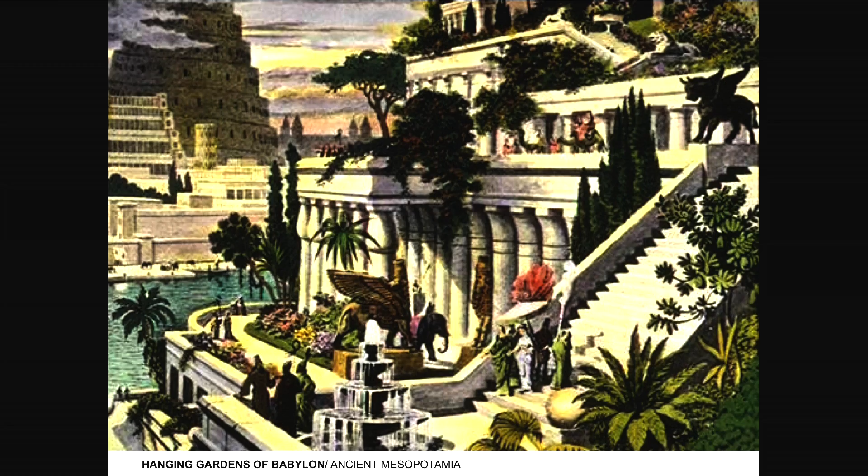It was built in a drier climate, brought in all the plants, the lushness for Nebuchadnezzar's wife, who longed for the lushness of it. And Michael, if it makes you feel any better, they did pump the water up and recycled it. So there's a precedent. An Archimedean screw, which is not a dirty word. It's actually a pump.

This is form, I'm function, apparently.

Okay. All right. So at any rate, we really learned a lot from these, and not a whole lot has changed over the millennia. Biophilia is a human tendency to affiliate with life and natural processes. Now, it seems odd to a group of folks that we have here, landscape architects and students, that you really have to associate nature with people and lead them to it. It's second nature to us, but we have to realize that most of our clients and the end users of our projects aren't necessarily as tuned into this. And so it's up to us to help them understand that.

Next. And we all know that there is comfort in the landscape, especially associated with water. And Olmsted certainly was the prince of knowing all of this, and understanding the lungs of the city was so important in terms of our human health, particularly in urban environments. Next. And in terms of performative landscapes, those landscapes that act for us and help perform within the landscape to help cleanse and to purify.

You may not know that Frederick Law Olmsted, during the Civil War, was the Secretary General of the Sanitary Commission. And part of his job was working with the Union forces in understanding some of the issues with water and bad water specifically in the Army. But he used this knowledge when he began working in Boston with the Emerald Necklace, really understanding that water could carry disease, it could carry illnesses, but at the same time, you could also use water and nature to be this performative landscape that gave comfort and pleasure to people and worked for us.

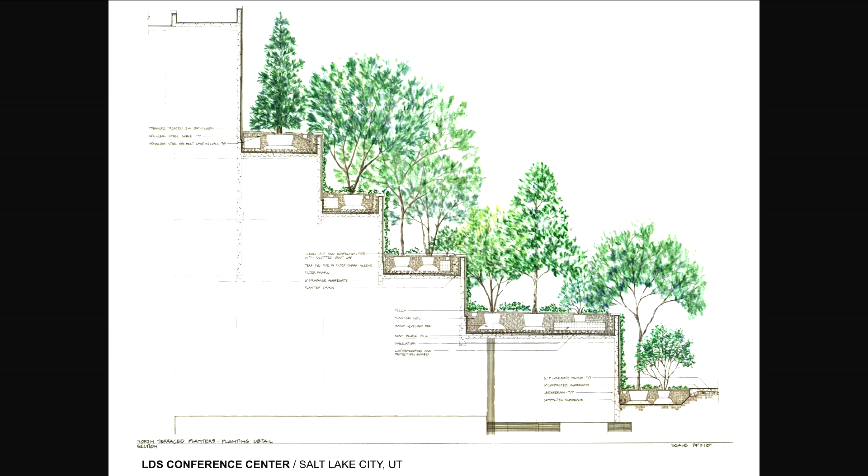Next. You can see here at the top on the roof, there's a 4-acre meadow. And this is, again, a water-receiving landscape, but we were trying to use native vegetation that used the lowest amounts of water and also the lightest and shallowest depths of soil. But you can see one of the things we were trying to do was really to connect those natural elements across to the rest of nature. Next.

So we're going to talk a little bit about moving ahead with some ideas about how to make places better and make them better for people, as well as for the ecologies that are supporting the place themselves. Steve Kellert at Yale is a proponent of this idea of restorative ecology. And we say we use ecotechnology, which is taking the world of ecology and applying it into the built environment for specific purposes of achieving performance. And that is the performative landscape.

Steve says interaction with nature is critically important to human well-being and development, but sadly has been compromised and diminished in modern times. Through deliberate design, this connection can be repaired and restored. Well, think about a shopping center that was built in the 60s and 70s. Think about your project that comes in later to displace that.

You have an opportunity to restore that place for people and for the ecologies that were displaced prior to your project going there. So this moving ahead idea is about restoring. This project at MIT, this is, believe it or not, a Frank Gehry building. I know it's tough to imagine. But here's the Gehry building with Laurie Olin's landscape.

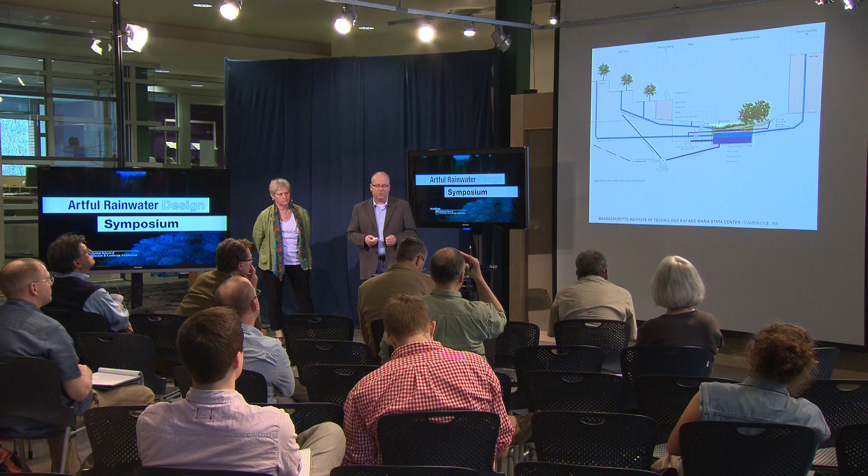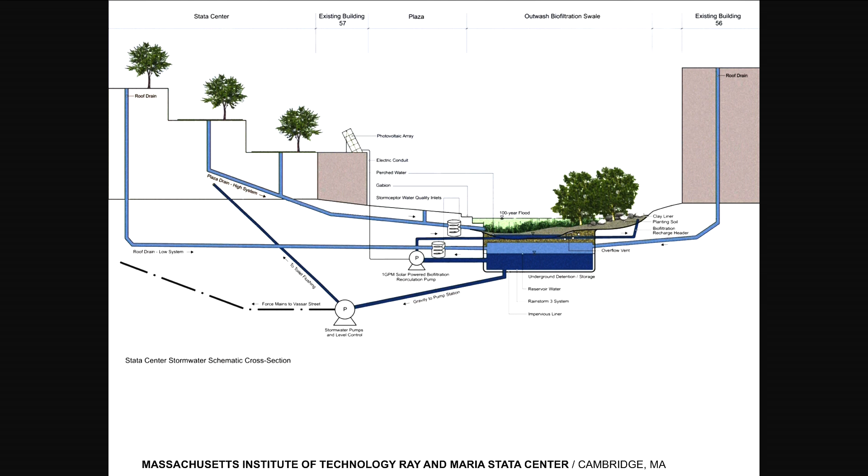And where we ended up, we didn't know we would end up here, but we ended up in section here with a split system. The system that you just saw, the outwash basin, is the perched surface on the top. It's separated from an underground storage chamber through a geomembrane liner, which segregates the water introduced to the upper surface, flowing vertically through the plants, and then falling into a catch structure underneath, a structure that simply holds water and allows it to be discharged slowly downstream. This was a system that could accommodate all of the water involved in a way to achieve the vision for the project, but also satisfy the criteria and the practical realities.

We had an interesting problem here in that the receiving stream off to the left, the Vassar Street sewer, was a combined sewer system, which was being separated. The replacement drain that was being provided was going to be 3 feet higher than the sewer connection was currently located. So we had to pump. And when we had to pump, we had to understand the relationship between how much discharge to put into the storm sewer versus how much to store behind it in a storage system. By using this strategy, we're able to optimize the size of the pump and the size of the storage so that there was 1/10 the discharge, a 90% reduction in peak rate discharge based on this configuration. So that's a huge stormwater advantage.

Now, because we had that water stored in these tanks, we said, well, why don't we just use this water for toilet flushing inside the building and irrigation? In addition, the system includes a solar-powered recirculation system that takes water from below and continues circulating it through the landscape for ongoing water treatment, but also to keep the wetland itself thriving. Pictures of its final construction. It's been in place about 10 years now.

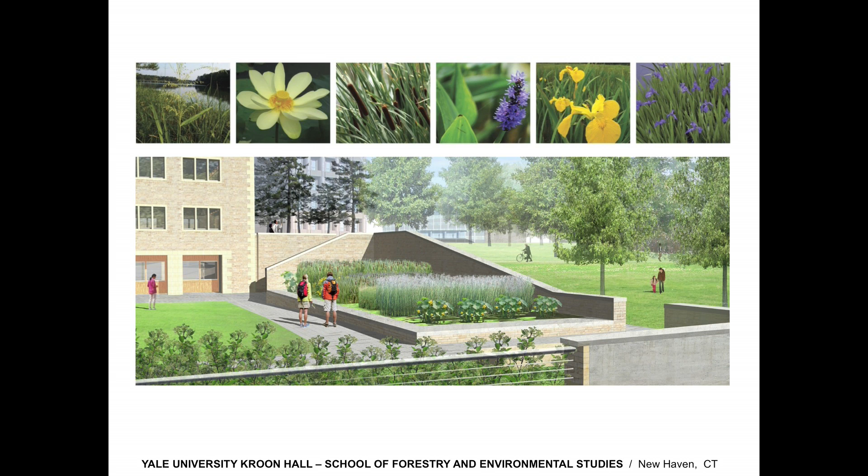I wanted to shift gears a little bit and talk about the specific objectives. That's where we ended up. We approach our projects today with certain goals in mind. We ask our projects to perform to certain levels. So Sustainable Sites Initiative and LEED, of which I'm a member of the leadership of both of these initiatives, have set performance metrics for the work that we do. And we use this project at Yale. This is a project associated with the recreation of our master plan ideas for the Science Hill area. This is the Michael Hopkins designed building.

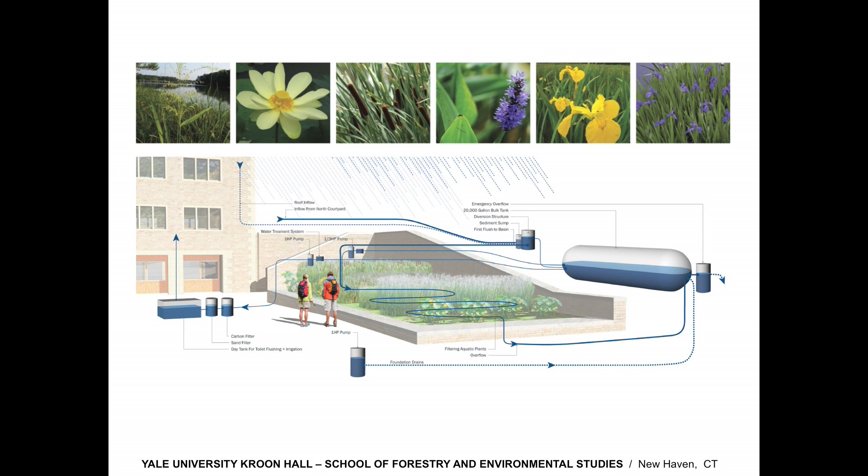This place, it's actually landscape on structure, but this was the place where the water from not only the building, but from the adjacent surrounding campus could be directed and treated through this aquatic planting system. So the system involved a series of measures of moving the water in the directions it needed to go by diverting first flush into the basin, for example, flow through the basin planter and the aquatic vegetation that's planted there, storage of the excess amount and recirculation through so that we constantly have water moving through. At the same time, withdrawing that water for reuse.

This place has been built for about 6 or 7 years now, and the big difference here between this one and the last one is we actually tried to achieve specific results. We started with targets in mind, how much water we believe that we could save and what that would mean to the combined sewer discharge in New Haven, and the water quality treatment aspects at the same time, all part

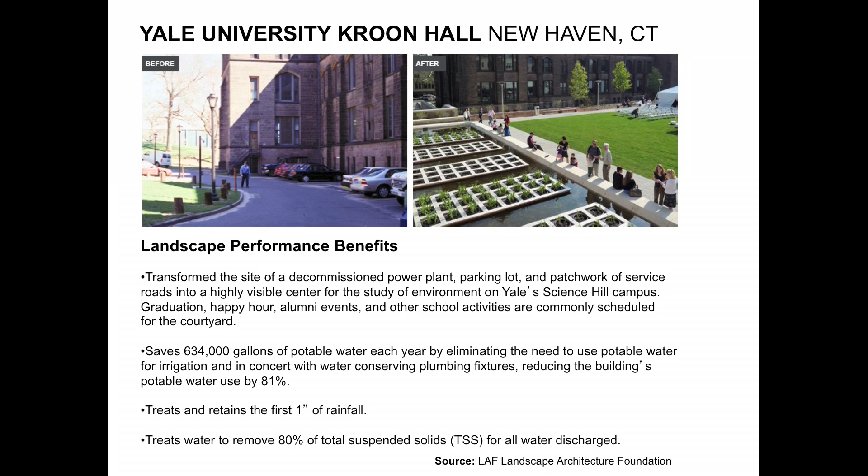of the design. This is a fortuitous project because, very coincidentally, the fellow who was the chair at the time of the Forestry Environmental School here, the client, was actually Steve Kellert, the fellow who I quoted in the beginning. So there was a complete alignment about our interest to get this project to be performative and his own mission with his students about educating them about environmental performance. So it was a really good alignment of synergy there.

You know how long it takes an engineer to explain something?

So, one of the things that we find ourselves often in the role of is helping our clients solve problems and sometimes inventing a solution that they're not quite ready for. In the case of the Philadelphia Museum of Art at the top of the Ben Franklin Parkway, a very picturesque site within Fairmount Park, the museum was in the process of expanding their facilities, and one of the enabling projects was to find parking for 500 cars.

So we started looking at this, and we said, well, boy, if we had even 450 cars and you did a surface lot, you'd pretty much wipe out any area around there, and you'd wipe out some very significant portions of the park. The museum certainly wasn't going to build surface parking, but they did want to build a structure. We said, well, if we took the side of the hill out, and we put the parking structure within it, and then built over it, you could build a sculpture garden on it.

And part of the problem with this is that then they call your bluff, and you have to figure out how to build this stuff. And so you can see that at the end of it, what we were able to do was to have a parking structure that actually had a lot of natural ventilation and a lot of light, and also the sculpture garden that they weren't even considering building at the time, so we were able to help them have an exterior collection, have a beautiful site.

And one of the things that I really enjoy about this project, in the next slide, you can see that it connects very closely to the historic waterworks. It sits into the site quite naturally. And people have a notion that green roofs are what's on top of that elevator, okay? We managed to get a 4-acre green roof over this parking structure. And a little unlike the project in Salt Lake, where we were connecting nature to nature, in this instance, we were trying to fit a natural environment within the context of the city. And this is our result.

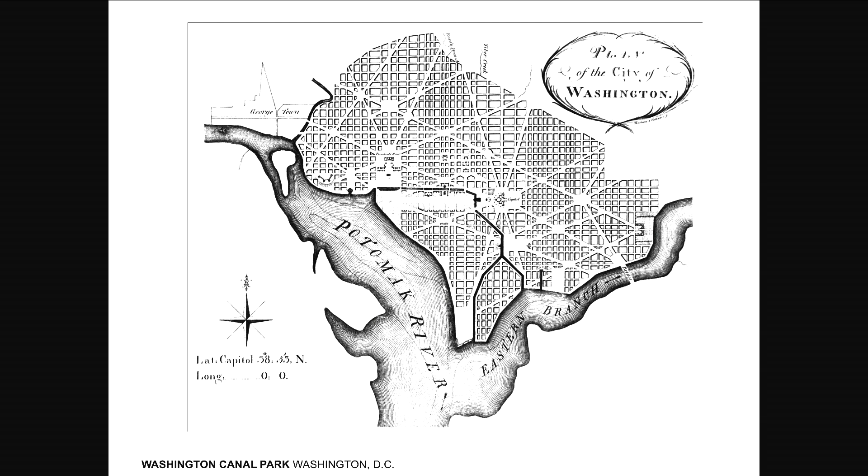So to a more contemporary example, this project was just finished. We finished the construction, if I can say we're ever finished, punch list notwithstanding. The site of the Washington Canal in D.C. The Washington Canal, a historic canal system, connected the Deepwater Anacostia Eastern Branch to the Chesapeake and Ohio canal system up through Georgetown and beyond, and actually moved from the Navy Yard area today on the Anacostia to the foot of Capitol Hill and along the mall, along where Constitution Avenue is. There isn't anything left of it right now.

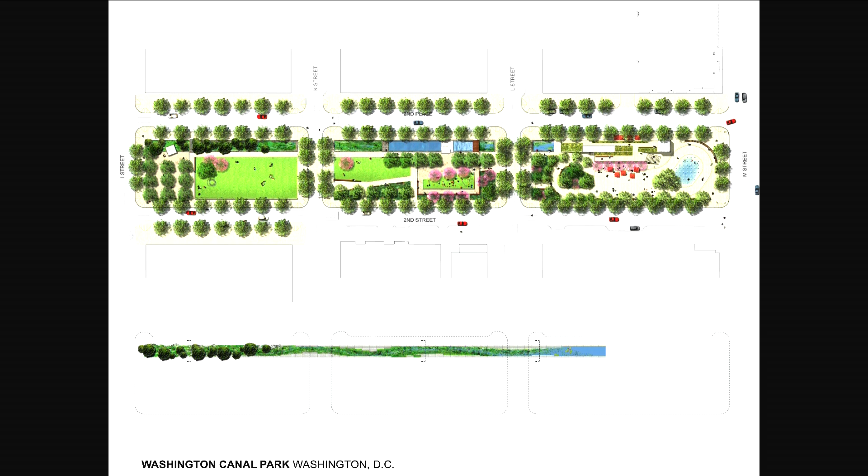And our client, the Canal Park Development Association, was looking to build a park that would be an economic catalyst for development within the region, but also pay homage to the canal system itself. So along the top of the rendering here, you see what we've done in design to articulate those remnants. There's no physical remnants, but to articulate the vision of what used to be the canal system.

Beginning on the left with the north block, a rain garden system that would turn into a water sheet punctuated by architecture along the canal emulation that was evocative of barges, resulting in the end in a linear pavilion oriented along the canal itself.

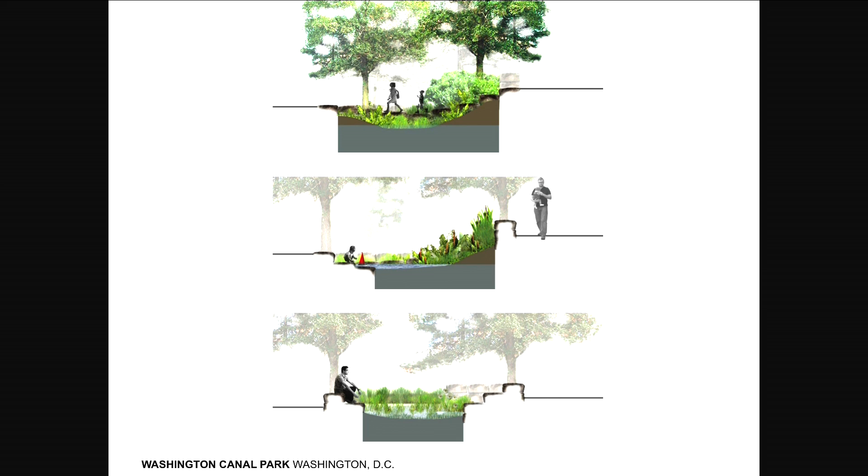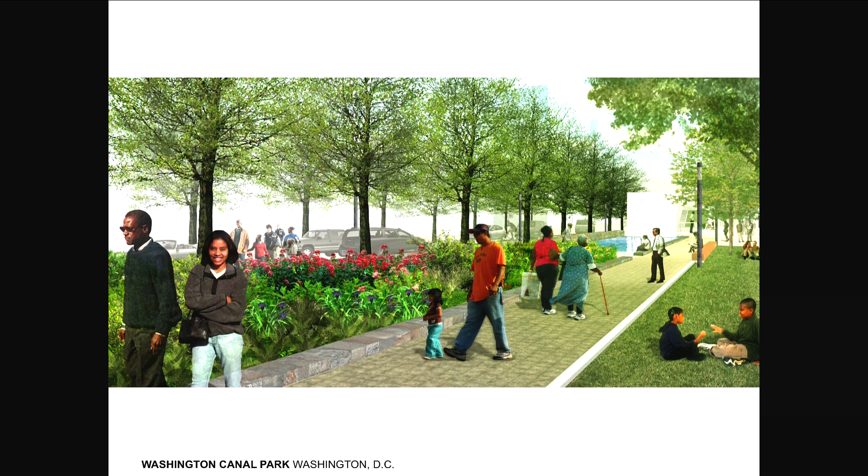Transforming the site from a brownfield site to a place where people can enjoy the amenity of the park, and yet we can restore the ecological function at the same time. This idea of restorative ecology, recreation of linear systems, rain gardens, developing water sheets as we go from north to south. Here's a picture looking from north to south along the rain garden, looking down to the right side where the pavilion is located. Again, these kind of barge-like ideas.

It is a heavily programmed site. The south side of the park, the south block, which is on the right, has a skating rink, water fountain, cafe, pavilion, and it's very active and it will be actively programmed. The mid block is also programmable for flexible events and recreation, and the north block is more serene and contemplative space. This system is a green infrastructure system.

It exists to manage water not only of its own footprint, but of adjacent development parcels. The water that is falling on this site, in the streets, and on the adjacent parcels is collected within the park system, and we have a series of systems that store and treat the water for reuse. We have 100% reuse of water on this site for spray irrigation, for irrigation of our landscapes, for makeup water for the fountains and ice rink, as well as toilet flushing. So all of that water comes from not only the park itself, but the water inputs from the adjacent parcels.

This is an economic catalyst for the development of this area, not only the amenity of the park, but also the value of the offset of stormwater for those 3 development blocks that remain. They can hook up essentially at no cost as part of an incentive program that the developer, the Canal Park Development Association, has provided as part of their package.

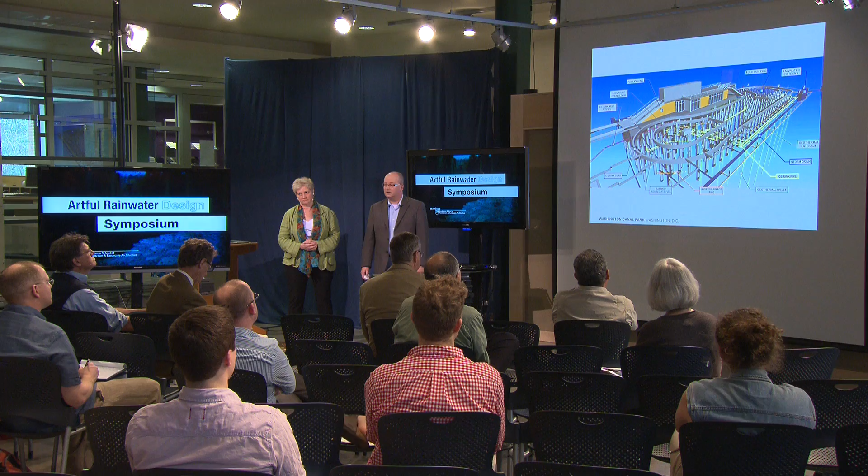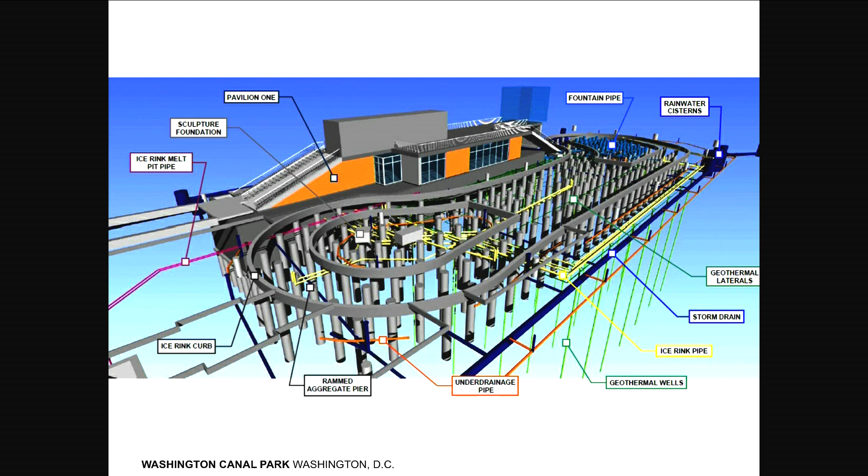So the last example I'll show you is a recent competition that we won for the Green City Clean Waters Infill Philadelphia Soak It Up competition. And this competition challenged designers to think of ways of incorporating green infrastructure into 3 typologies of the city of Philadelphia. The City of Philadelphia has undertaken this plan called Green City Clean Waters as part of the combined sewer overflow mitigation strategy that they've embarked on. They've chosen to change the land itself rather than to create new treatment systems and new underground tunnel systems that all other cities have chosen to date.

They're taking a green infrastructure approach which goes up into the watershed and asks each of the watersheds, all of the land, to contribute 1/3 of their impervious area, convert that into pervious area or land that is treated through green infrastructure. So it's quite a challenge, and it's quite a challenge in an urban environment to imagine 1/3 of the hardscape has to become softscape or its equivalent.

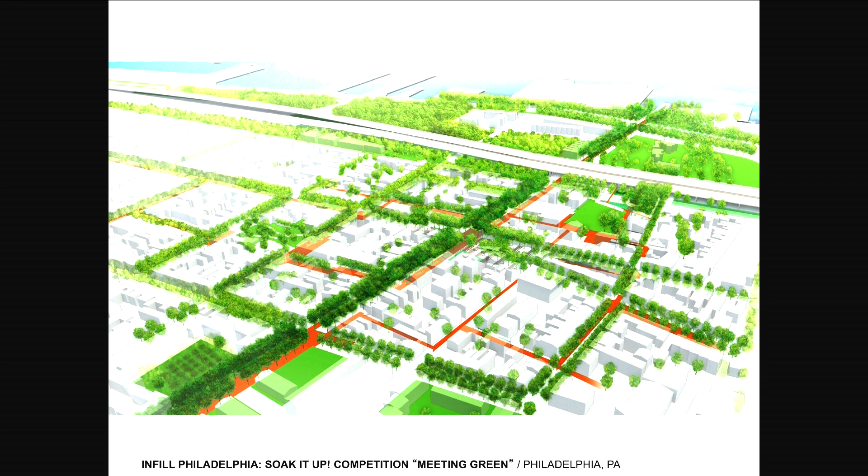There were 3 sites that were given for the challenge. There was a warehouse site, a commercial site, and a neighborhood site. We chose the neighborhood site as we felt it the most challenging for us, and our ability to relate to not only the creation of green infrastructure, but the fabric of the neighborhood itself. We can't instill green infrastructure into a neighborhood without understanding the neighborhood itself and how to design accordingly.

So overlaying the places where people are with the places water needs to be managed, and understanding that this is really more about city living than it is about water management, but we had to do both at the same time to be successful. The alignment of people and place, we create a system that we call Meeting Green, and that was the title of our submittal.

Meeting Green involved leveraging the assets in the community in that part of the neighborhood that already had the strength of place, and asking those places to do more for people by reinforcing the meeting places themselves through additional investment, but also by asking those places to ecologically carry a larger burden for stormwater management, so that the city typology, the neighborhood typology, could also contribute its share throughout Philadelphia if the goal were to be achieved.

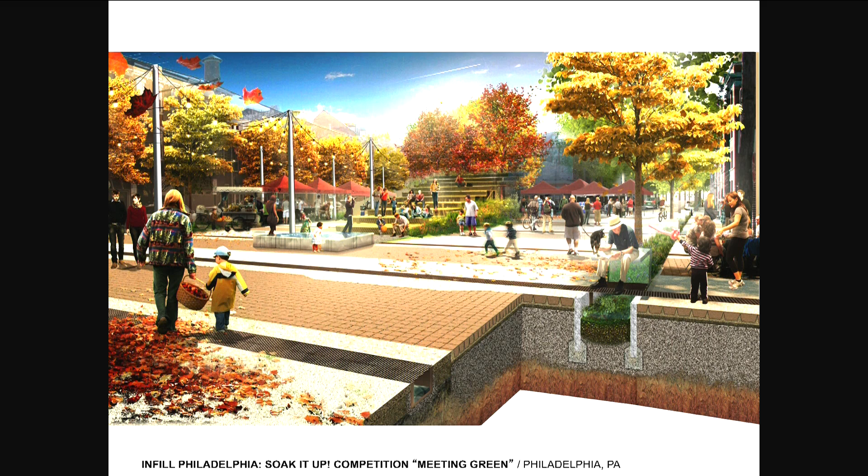So areas such as Shot Tower Park, which is actually the legacy edge of the Delaware River, evoking ideas of how design can articulate the old idea of a river edge and water receiving landscape. And then the central meeting place at the intersection of Christian and 2nd Street here, that this is actually the place where water is managed, and it's managed in a way that brings people into the equation and really centers around people meeting together and creating stormwater solutions at the same time.

So we're going to be done early, and I'm glad because we'll have plenty of time for question and answer. So believe it or not, we can do it.

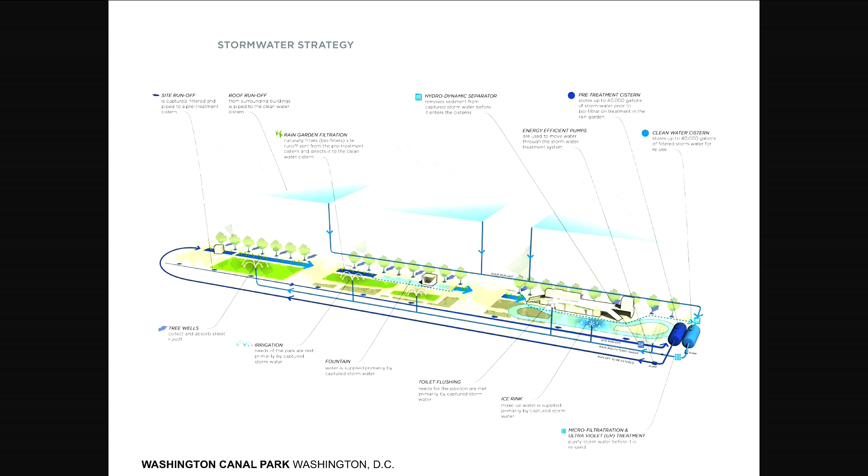The water is then moved through the rain garden, which I didn't say. It's distributed into the rain garden for polishing treatment, and finds its way down into the other tank. Oh, okay, so it is all interconnected? Yes, it's two loops around. No potable water? Correct, no potable water at all. That's pretty terrific. I should have mentioned, it does use the rain garden in a functional way to treat the water to the higher level, and then it is filtered and disinfected after that.

Okay, great. And then, not related to that, but was this client the city, or were there developers involved? This was an economic development entity, the quasi-public business improvement district that was responsible for the economic development of this area. So they have an interest in making sure that it's economically viable. Okay, thanks.

Well, I'd love, if there's time, for you to back up and go over Kroon Hall in a little more detail, because I've looked at your diagrams and tried to understand it, but I would love to have you go through a slow explanation of how those different systems are working. Sure. I can go over it in two hours slowly. I've done it before. Yeah, I'll give you the roundabout there.

So what we're trying to do with Kroon Hall is, as I said, treat the building water, but also the water from the campus. There's water coming from around the site, and that's what this is. This is the inlet to a diverter that takes flow one way and the other. Instead of through the stepped landscape here, we go through the aquatic planting as a first flush. So the first inch of the storm comes through and is treated, then it falls out into storage here. This is all by gravity. From the storage, it's available to be used in the building.

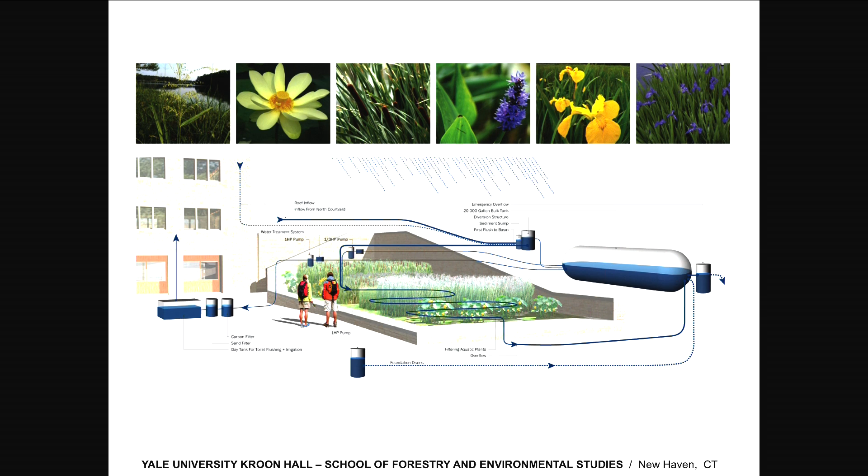That is by gravity? Yeah, the whole thing is by gravity. So that tank is lower than it is? Yes, exactly, some graphic liberties here. So this is all flow through, but in order to avoid problems with standing water, we have to keep water moving. So we are purposely recirculating, drawing from the tank and recirculating that through so that in times of no rain, that water is continually being treated as well as moving, to avoid mosquito problems and so forth.

So it's a system that is designed to move water and show the water at the same time. Show the next image, I think. The next one. So you can see the circulation. The water stored in that tank, it's going to gray water use in the building? Yes, it's going to gray water use, which is filtered and disinfected here for toilet flushing.

So is this a quality treatment and not quantity? It is both, because we're removing volume and allowing the elevation to stage up in the tank. The extra volume you see is the quantity flow rate mitigation, and we're removing volume by using it in the building, as well as evapotranspiration from the plants. But how are you sure the appropriate amount of water is removed and used between storms? Well, we're not counting on that, because we're shutting that system off to allow additional capacity on top. We did the same thing at MIT with the freeboard in the Dell Pond; the water goes up in the tank, and we intentionally did the Dell that way too.

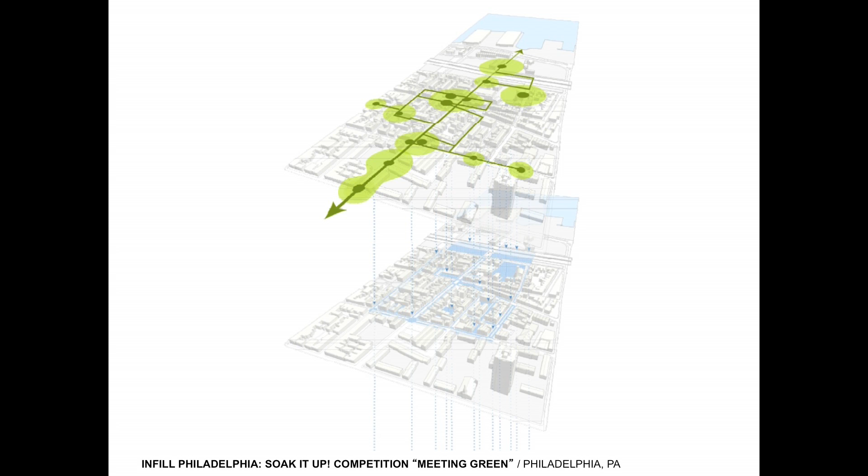So our approach was to invest in the neighborhood where we not only achieve the ecological performance for water, which is driving this whole thing, but invest the dollars in the things that matter to the people who live in Philadelphia. So instead of burying things, we're articulating them on the surface. Using these water systems as places where people meet is the whole idea behind Meeting Green. Our typology includes meeting greens like Shot Tower Park and the center green, linking greens, the streets tasked with green infrastructure, and the alleys, each with different solutions. So our strategy is a typology of solutions that fit the neighborhood scale.

Before anybody asks about cost, it's more costly to do it this way, but you're taking dollars you're already investing in neighborhood infrastructure, for example your road rebuilding projects, and doing them differently and smarter. So there is a premium to pay, but you're reinvesting in the fabric of the neighborhood at the end of the day.